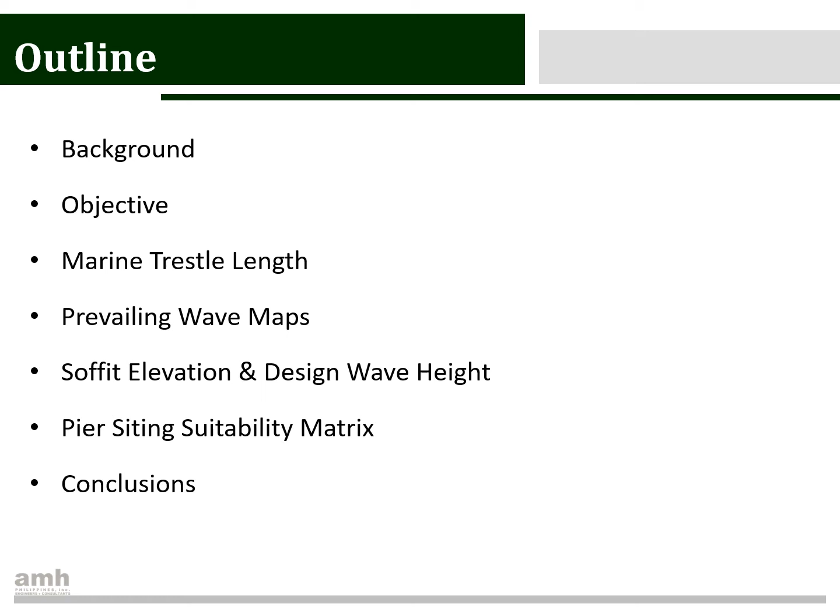For a quick background, an open pier for cargo is to be optimally sited along a 6-kilometer long coastline, which is partially sheltered against waves. Several reaches of the coastline are dotted with fully grown mangroves, while some are close to channel outfalls and debris stagnation zones. However, local laws do not allow for clearing of mangroves.

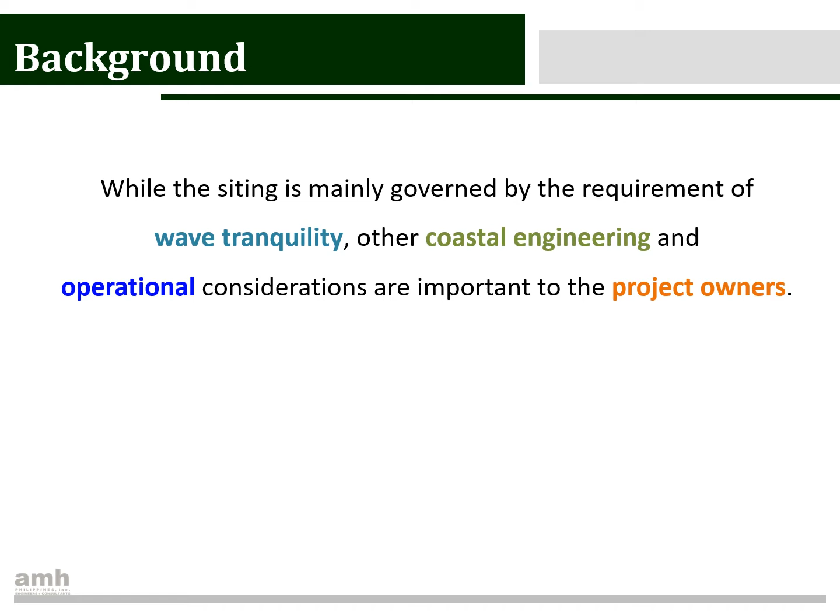As such, while the siting is mainly governed by the requirement of wave tranquility, other coastal engineering and operational considerations are important to the project owners. 5 potential areas with sufficient space and clearance from mangroves were determined. An objective ratings-based approach was implemented to determine the optimal location based on coastal engineering and non-coastal considerations.

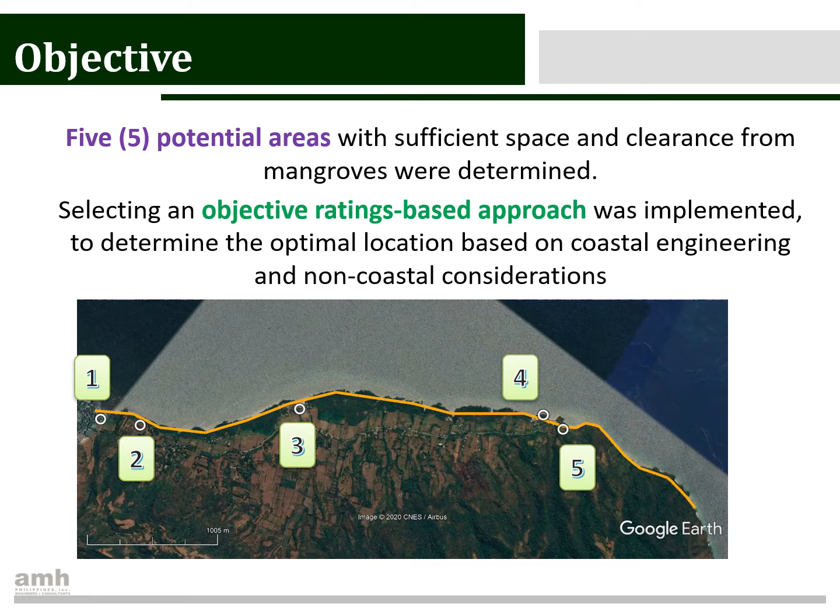Presented here are the first 3 coastal engineering considerations. First is the marine trestle length, which is primarily a function of the vessel draft requirement. Second is the maximum vertical distance to seabed, which is the depth of the marine pile from the mean tide level to the seabed elevation as a result of the landing alignment.

Third is the soffit elevation requirement, which is the minimum elevation of the deck soffit, or the bottom of the deck, based on the sum of the freeboard and the highest combined wave run-up and storm tide level from the simulated critical typhoons.

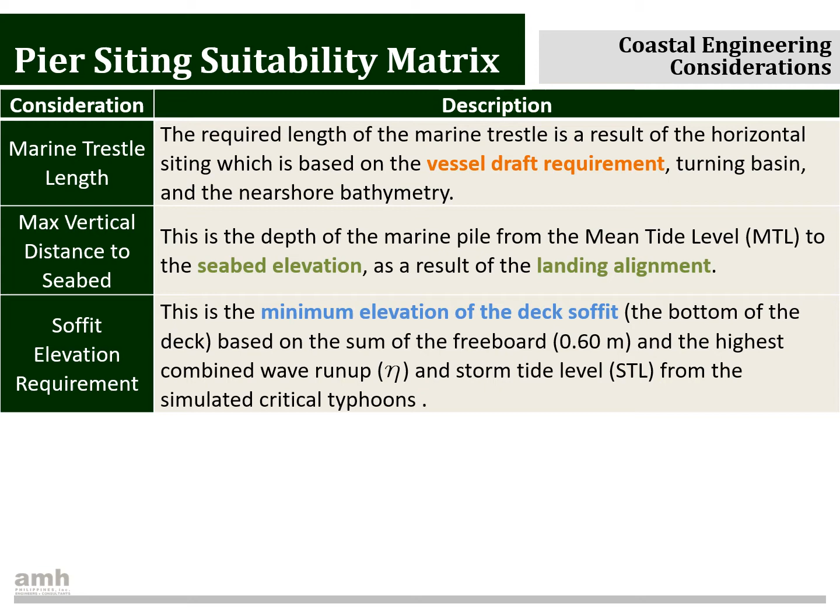Fourth is the design wave height, which is simply the highest significant wave height calculated from the critical typhoons and will be used for the sizing and design of the marine piles. Fifth is the dredging requirement, which is the approximate area that will have to be dredged as a result of the pier alignment and the turning basin of the vessel.

Last is the landing alignment, which is ideally in the direction of the prevailing wave approach, or wave optimal, to reduce the size of the marine piles, but could sometimes not be aligned with the wave approach to compensate with the pile depth due to bathymetry.

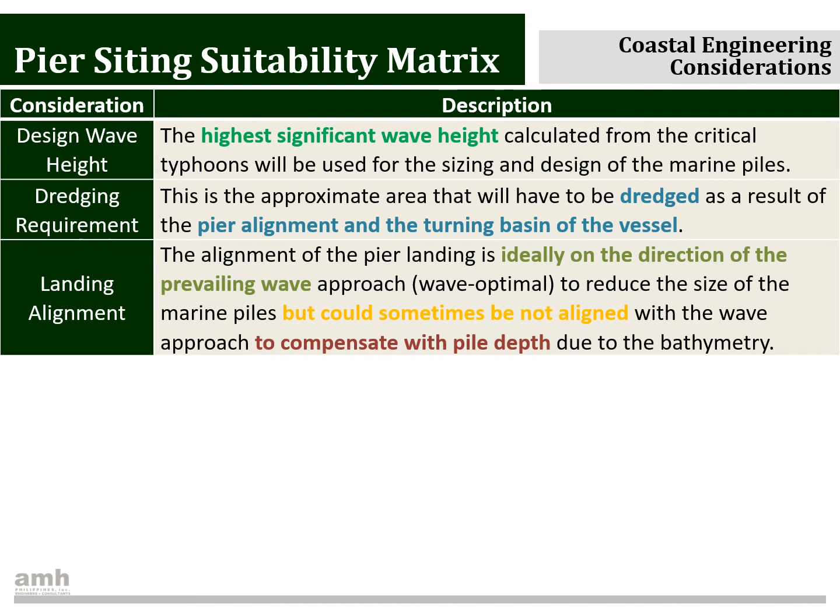So first, the considerations for the marine trestle length. The designed vessel is a Panamax-like vessel with a draft of 12.04 meters. This results in an under-keel clearance of 1.2 meters, and with a tidal variation from mean tide level and mean lower low of 0.57, we determined that the required draft is roughly 13.81 meters from mean tide level.

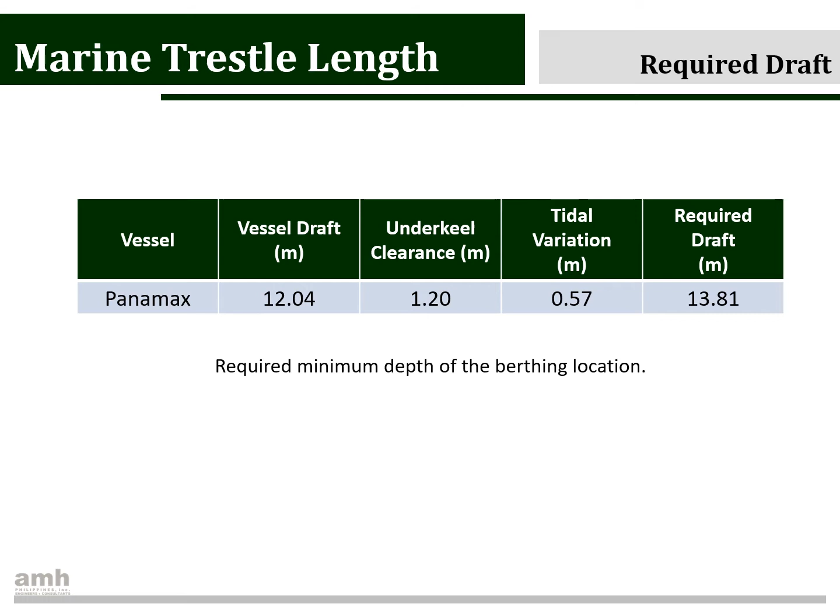For the turning radius, it was determined a 590-meter diameter turning basin would be required for a vessel with a loa of 295 meters.

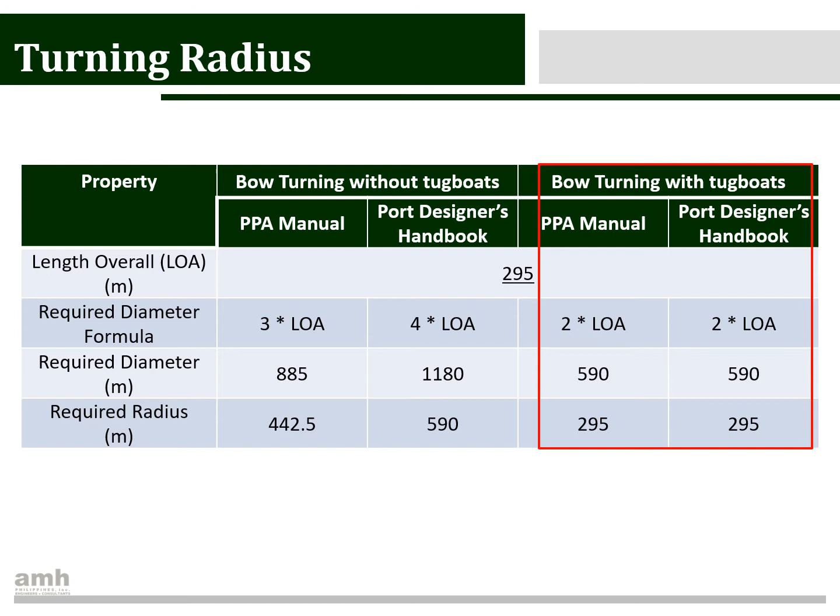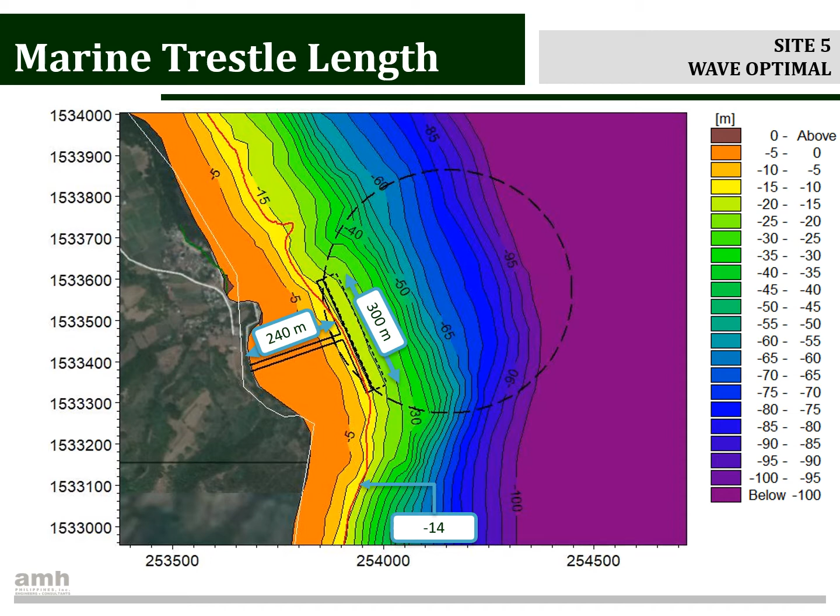We also analyzed the prevailing wave conditions of all sites based on the wind roses and available fetch for each location. This is a sample for the first site where we have the wave optimal approach such that the prevailing wave coming from the south runs parallel to the proposed pier alignment.

Or the depth optimal, wherein the refraction of the waves will now be hitting transversely across the vessel, inducing more load transfer to the fenders and pier.

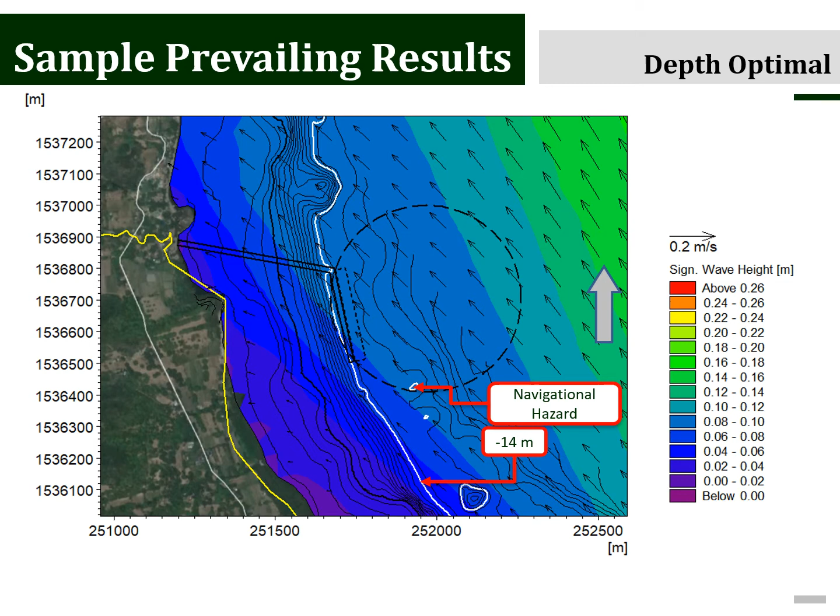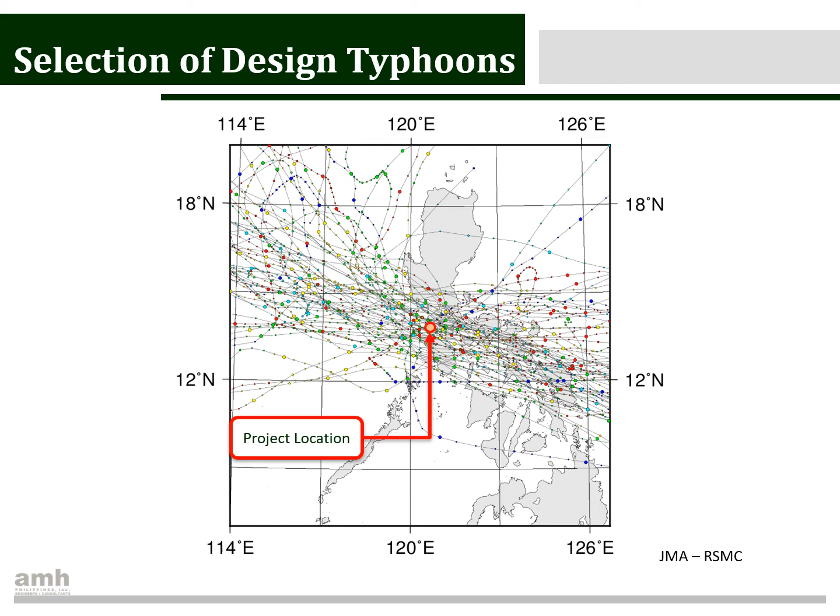Now for a quick discussion on the soffit elevation and design wave height. To determine the potentially critical typhoons, a 200-kilometer search radius was placed around the project location, after which 7 potentially critical typhoons were selected based on their wind velocity, pressure, and distance to the site.

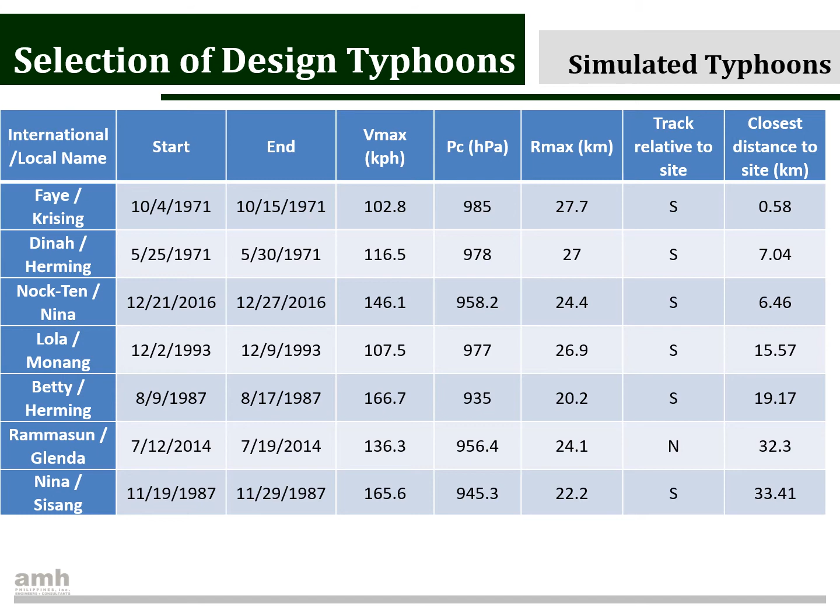To help illustrate the terminology, the minimum soffit elevation is a summation of the storm wave, the storm surge, and the astronomic tide. This is to ensure that the open deck pier will not be inundated by waves which would induce wave and deck forces and may damage any potential infrastructure located on top of the pier.

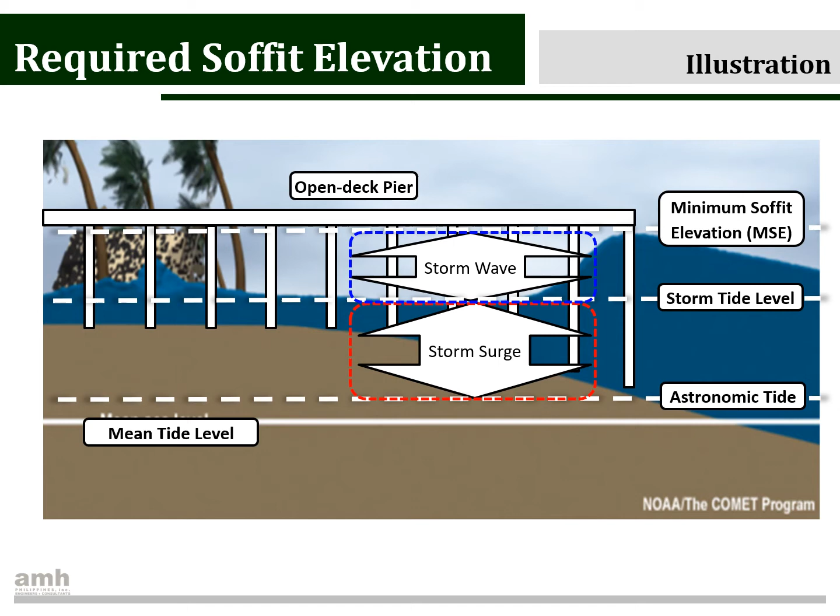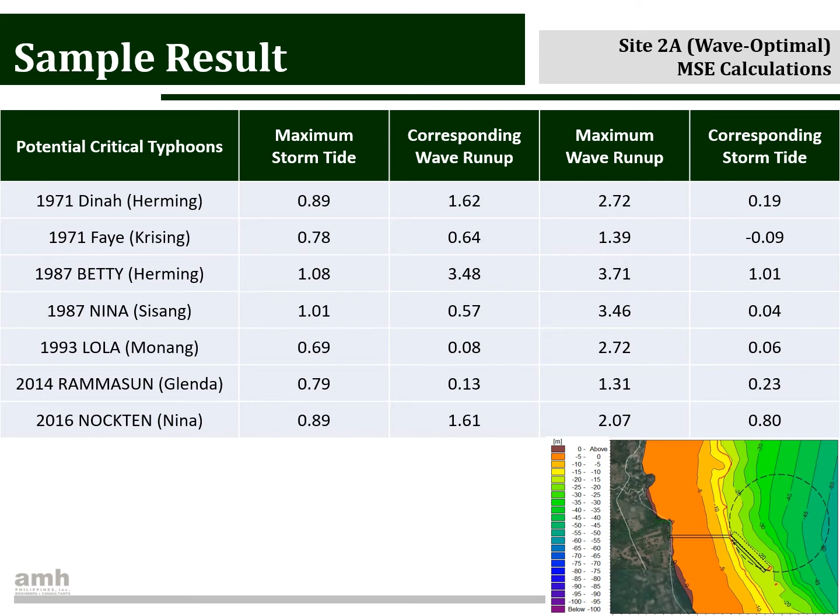So this just shows some additional sample results for Site 2A, where the exposure is slightly different. To summarize all sites, we found that the 1987 Typhoon Betty, or local name Herming, produced the highest soffit elevation requirement, ranging from 5.1 to 5.4 depending on the location.

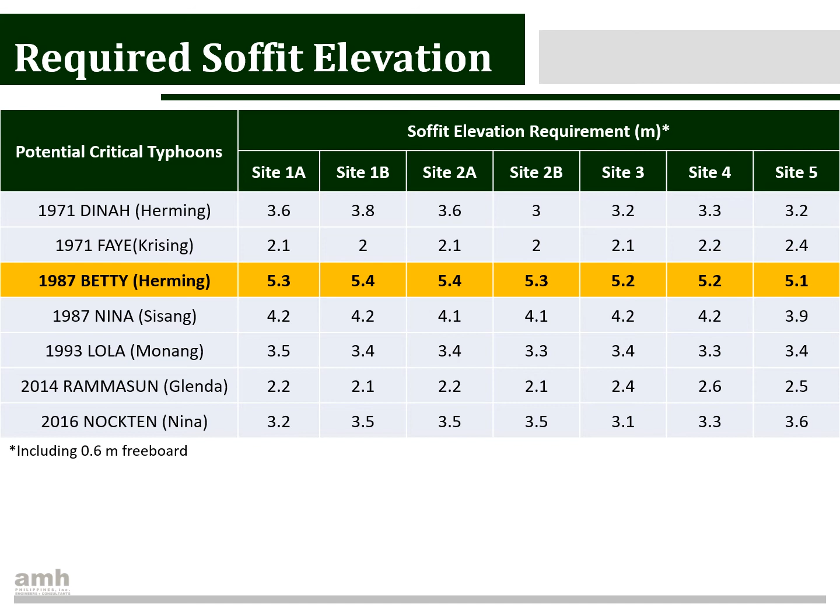Now all of this was input into the previously discussed pier siting suitability matrix. Each pier alignment was rated from 1 to 10 based on the suitability to the corresponding criterion, with 1 being the most suitable. Weights are given to each parameter based on the consultant's engineering judgment. A higher weight signifies a more critical factor for siting.

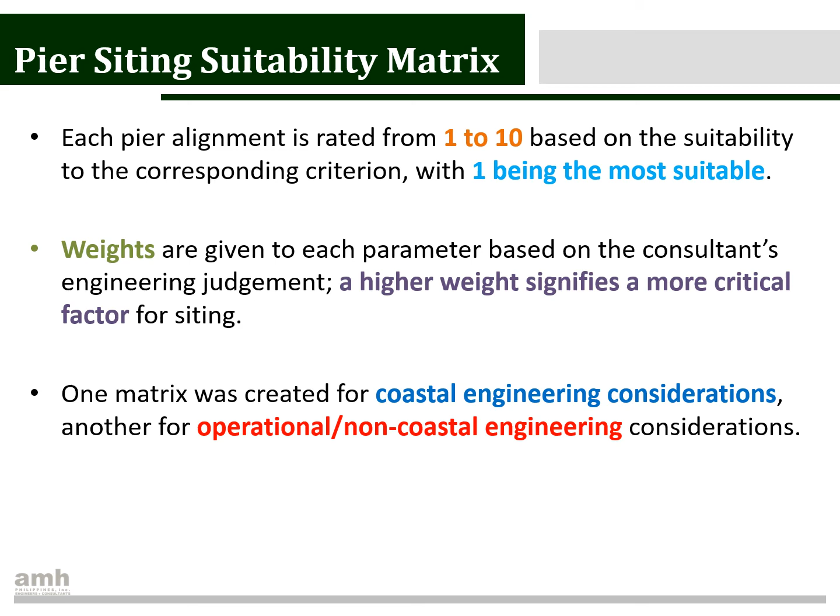One matrix was created for coastal engineering considerations, while another for operational or non-coastal engineering considerations. So to illustrate, a higher value of the marine trestle length indicates a longer trestle, which would result in a higher capex for the proponent. Conversely, a lower value is more advantageous as it would result in a shorter trestle. So similar high and low versus disadvantageous and advantageous assessments were made for all parameters.

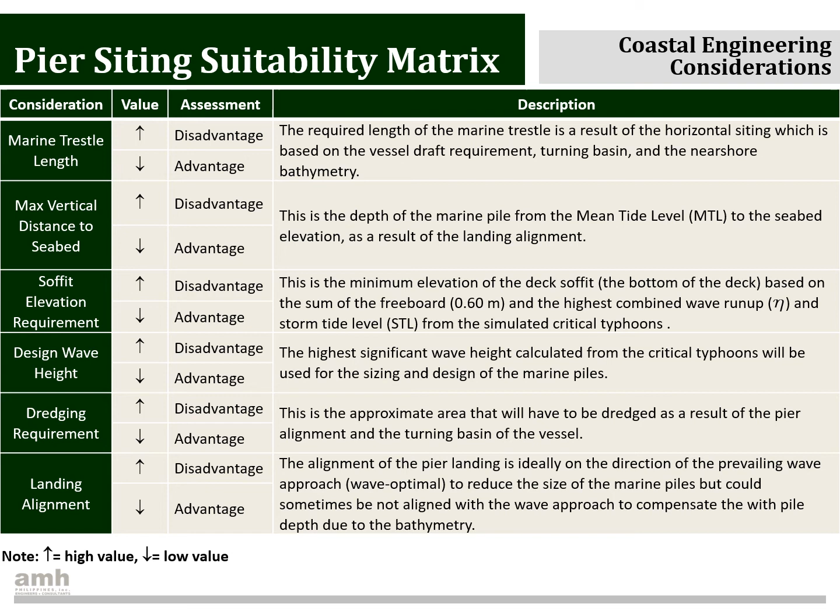To illustrate, item A, or the marine trestle length, is the length from the shoreline to the pier landing or the berthing area. Items B, C, E, and F correspond to the piles in their respective locations.

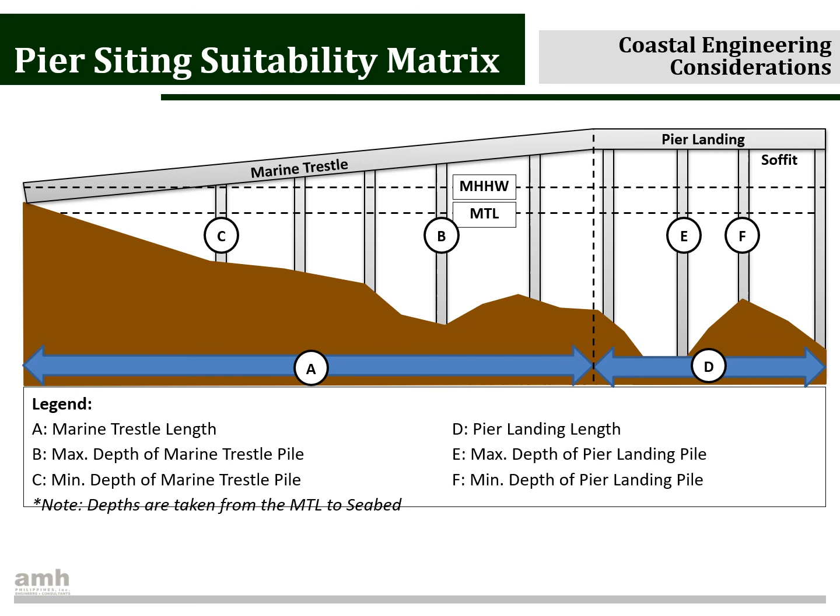So to summarize the characteristics of the different sites based on the 6 considerations, these are the final data per site per parameter. For example, we can see here the shortest trestle length is at site 4 at 215 meters, with the longest at site 1A and 1B.

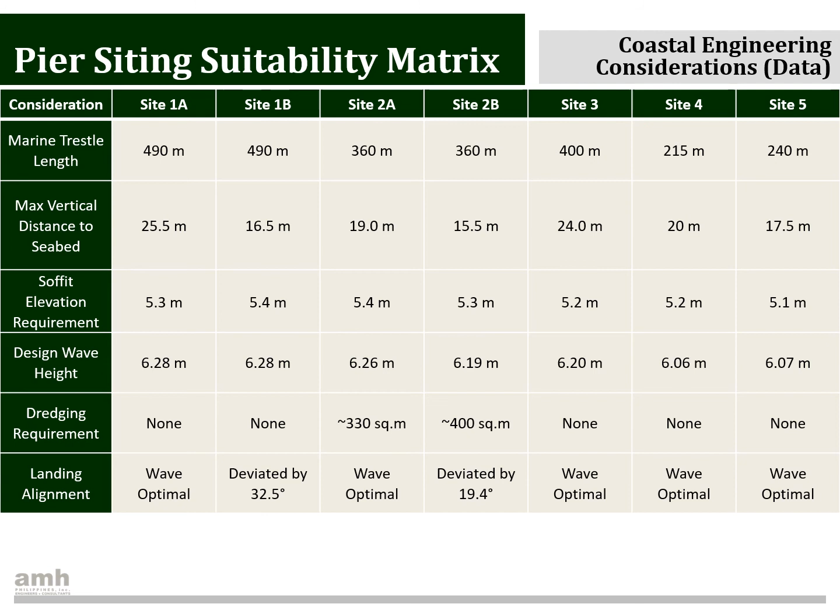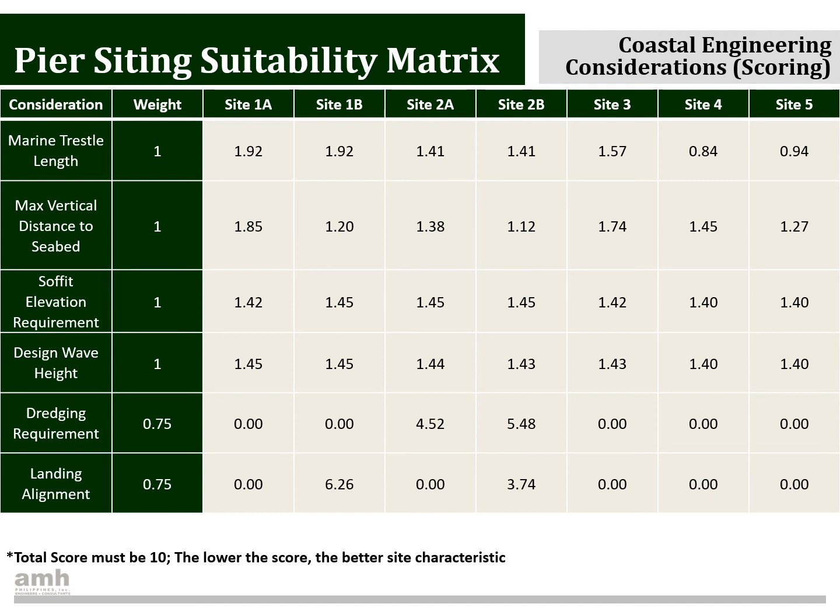Here we have the score and the corresponding weight per site per parameter. These were based on equations set and agreed upon with the proponent. To summarize this, we've got site 5 has the lowest score, meaning it is the most optimal based on the coastal engineering considerations. However, as mentioned before, non-coastal engineering considerations were also taken into account.

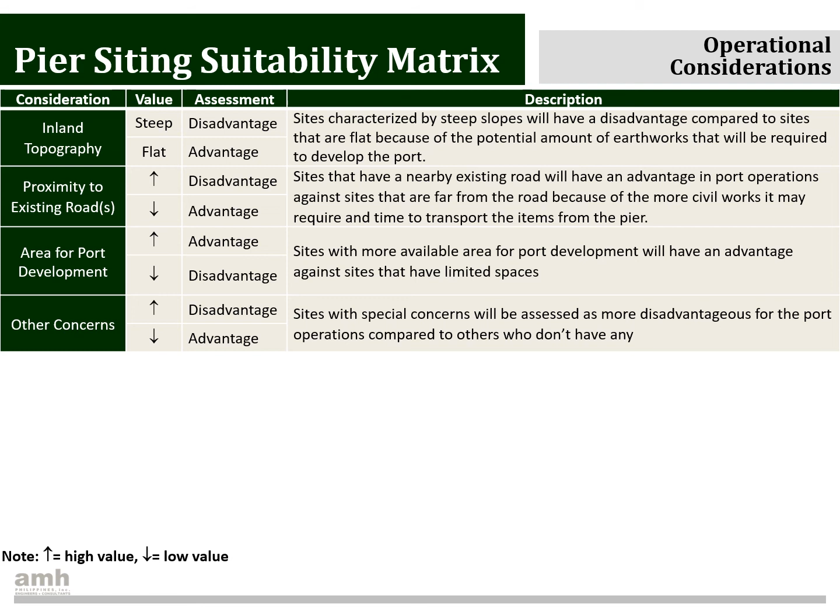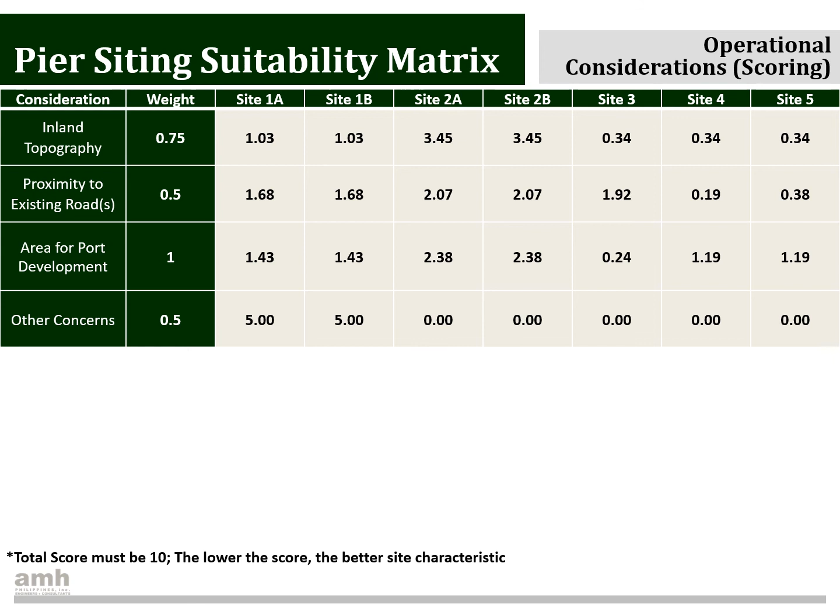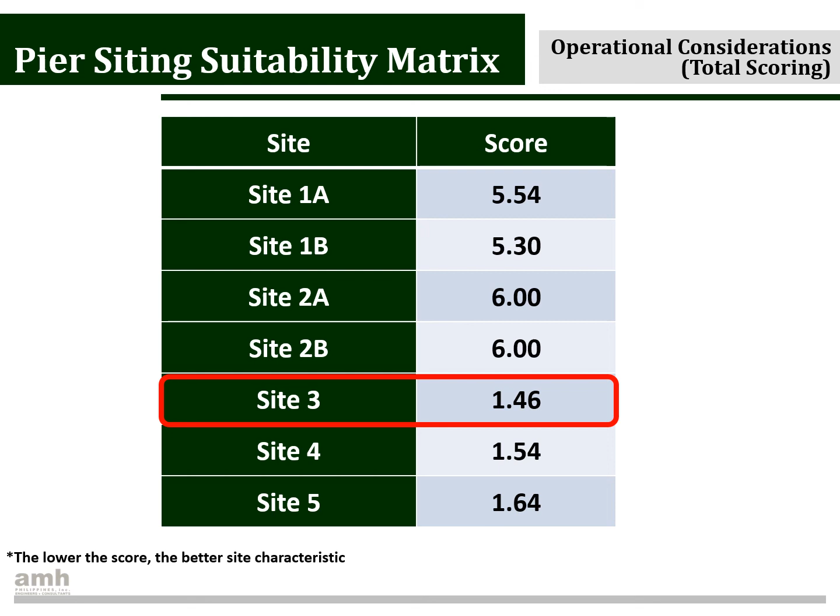Summarizing the operational considerations, it was determined that site 3 is actually the most optimal. However, combining the scores, we find that it is actually site 4 which is the most optimal in terms of coastal and non-coastal engineering considerations.

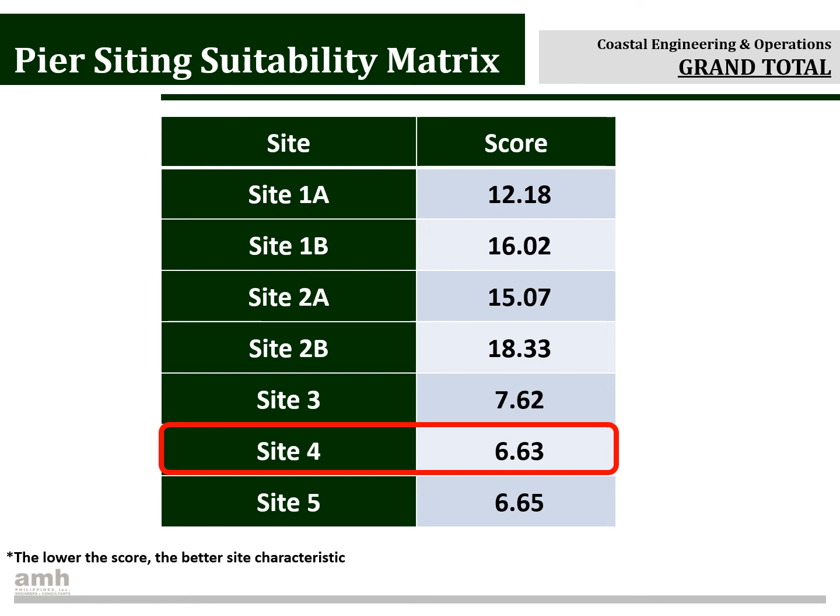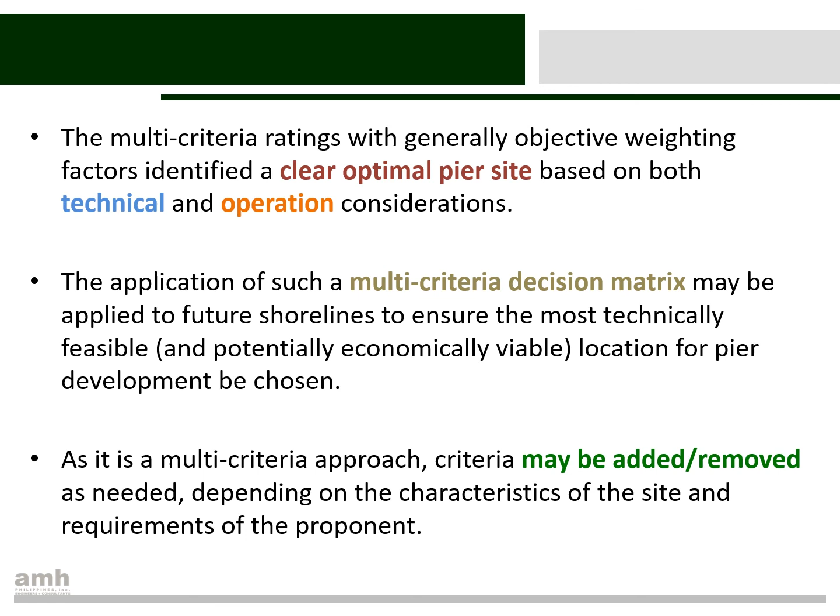Conclusions. The multi-criteria ratings with generally objective weighting factors identified a clear optimal pier site based on both technical and operational considerations. The application of such a multi-criteria decision matrix may be applied to future shorelines to ensure the most technically feasible and potentially economically viable location for pier development to be chosen. As it is a multi-criteria approach, criteria may be added or removed as needed, depending on the characteristics of the site and the requirements of the proponent.